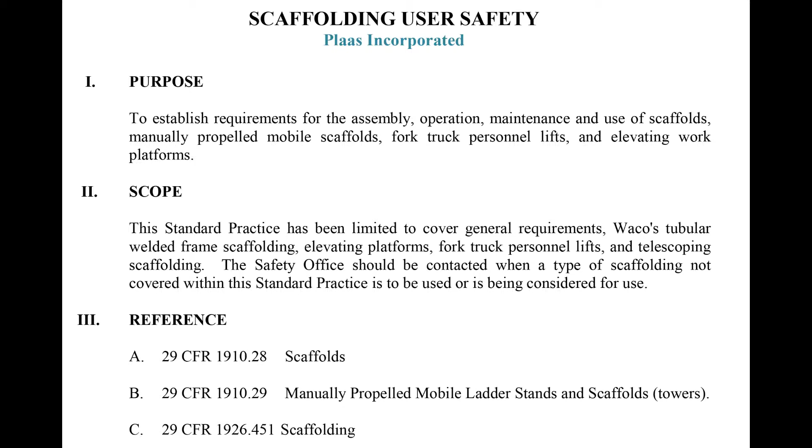Number 3, reference: 29 CFR 1910.28 scaffolds, 29 CFR 1910.29 manually propelled mobile ladder stands and scaffolds, towers, 29 CFR 1926.451 scaffolding. Procedure. General requirements.

When erecting scaffolding, the Scaffold Safety Rules, Appendix A, will be posted in a conspicuous location at the worksite. Supervisors shall ensure that all personnel who erect, dismantle, or use scaffolding are aware of the safety rules and are properly trained. All scaffolding and elevating platforms, either leased or purchased, will have the manufacturer's safety instructions for erection and use available. Scaffolding and elevating platforms shall be erected and used following the manufacturer's instructions and this standard practice.

Scaffold components manufactured by different vendors will not be mixed. Mud sills and anchorage points for scaffolds and platforms will be sound, rigid, and capable of carrying the maximum intended load without settling or displacement. If the ground area will settle, a large mud sill capable of carrying the load without settling shall be used to support the scaffold or platform. Unstable objects such as barrels, boxes, loose bricks, or concrete blocks will not be used to support scaffolds, planks, or platforms.

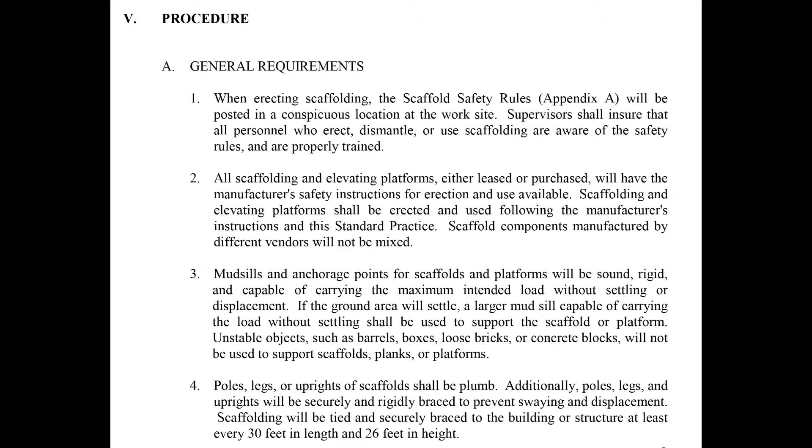Poles, legs, or uprights of scaffolds shall be plumb. Additionally, poles, legs, and uprights shall be securely and rigidly braced to prevent swaying or displacement. Scaffolding will be tied and securely braced to the building or structure at least every 30 feet in length and 26 feet in height. Exception: freestanding scaffolds may be 4 times the narrowest base dimension. If additional height is required, the base dimension will be increased, or the scaffolding will be tied and braced to the building or structure or have guy wires.

Scaffolding whose working platform is 10 feet or greater in height shall have a standard guardrail, midrail, and toe board installed. Scaffolding having a width of less than 45 inches must have standard guardrails installed on all open sides and ends when the working platform height is 4 feet or greater. Guardrails and midrails will be at least 1.5 inch nominal diameter with posts spaced not more than 8 feet on center. The guardrail shall be capable of withstanding a load of 200 pounds when applied from any direction and at any point on the top rail.

The top rail will be placed at a height of 42 inches nominal from the upper surface of the rail to the working platform. The midrail will be placed approximately halfway between the top rail and the working platform. Toe boards will be at least 4 inches in height and mounted within 1/4 inch of the working platform. Where persons are required to work or pass under the scaffold, scaffolds will be provided with screens between the toe board and guardrail. The screen will extend along both ends and sides of the scaffold and consist of number 18 US gauge 1/2 inch wire mesh or equivalent.

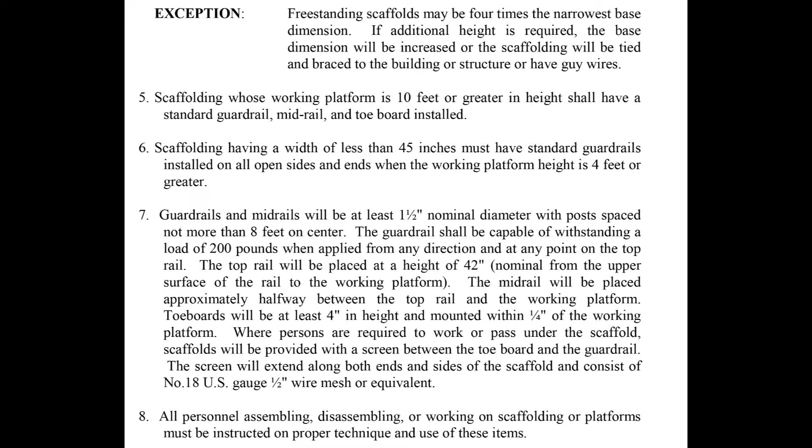All personnel assembling, disassembling, or working on scaffolding or platforms must be instructed on proper technique and use of these items. Manually propelled scaffolds and elevating platforms will not be moved when occupied. Head protection is required for workers on or around scaffolding. Working on scaffolds or platforms during storms, high winds, or when covered with snow or ice is prohibited. The live load of the scaffolds or platforms will not be exceeded.

A visual inspection must be conducted immediately when a scaffold or platform has been damaged or weakened from any cause. The structure will not be occupied until the inspection has been completed and all identified discrepancies corrected. Ladders or makeshift devices shall not be used to increase the height of the scaffold or platform.

Tools and parts shall not be carried in hands or pockets when ascending or descending access ladders. Tool belts, tool buckets, and ropes or other acceptable means will be used to raise and lower such items. Material being hoisted onto a scaffold must have a tag line.

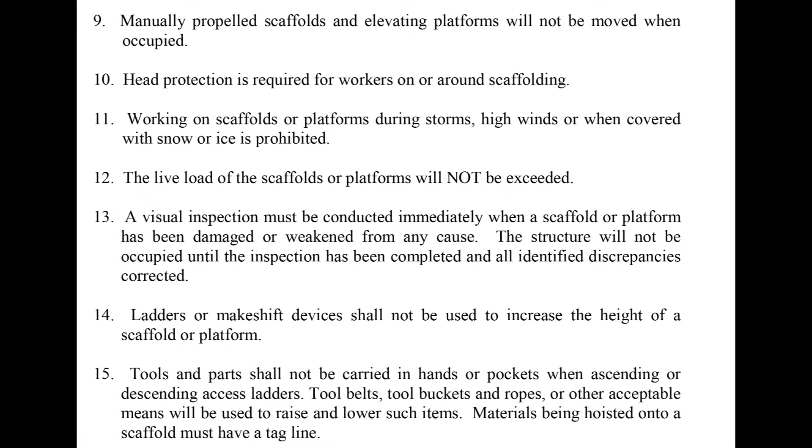Special precautions shall be taken to protect scaffold members, including wire or fiber ropes, when a heat-producing process or corrosive substances are being used. All wood planking shall be scaffold grade. The maximum span for wood planking is

Retraining is required in at least the following situations: where changes at the worksite present a hazard about which an employee has not been previously trained, or where changes in the type of scaffold, fall protection, falling object protection, or other equipment present a hazard about which an employee has not been previously trained, or where inadequacies in an affected employee's work involving scaffolds indicate that the employee has not retained the requisite proficiency.

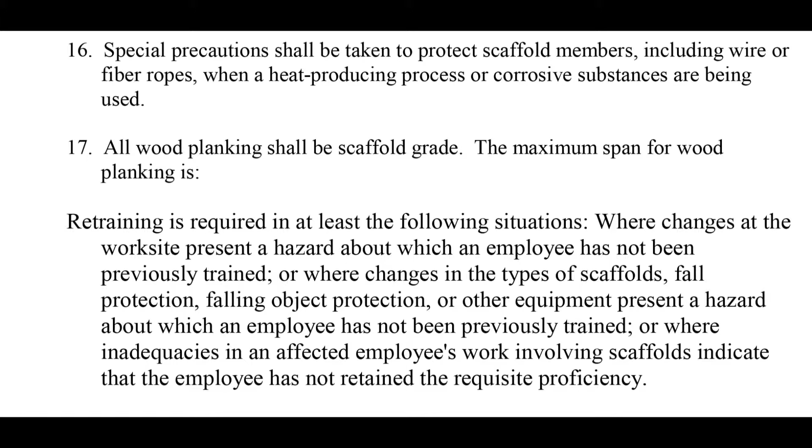Wood planking will extend over end supports at least 6 inches and a maximum of 12 inches. Additionally, planking will be cleated to prevent movement. Slippery conditions on scaffolds and platforms will be eliminated as soon as they occur. In-house manufactured scaffolding will be engineered prior to construction.

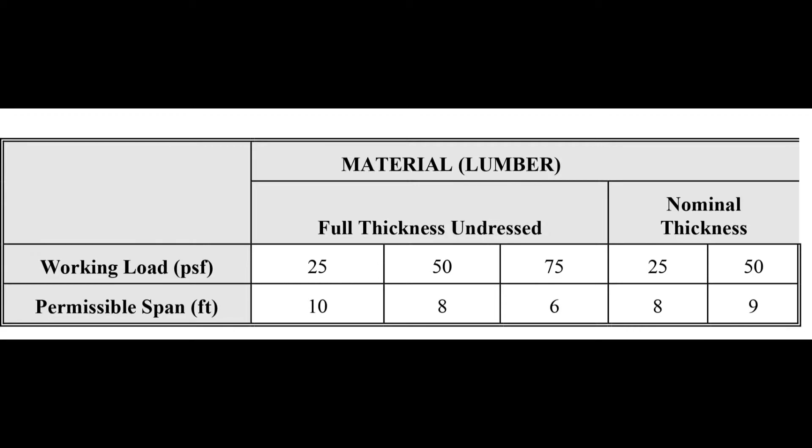Scaffolds and their components shall be capable of supporting without failure at least 4 times the maximum intended load. Wire, synthetic, or natural fiber rope used with scaffolds shall be capable of supporting without failure at least 6 times the rated load. Cross braces, runners, or bearers shall not be used for climbing. Access to scaffolds will be by stairs or ladders only.

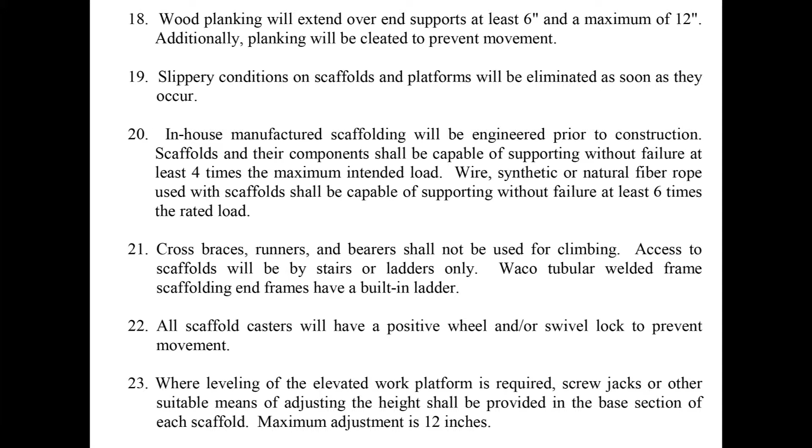Waco tubular welded frame scaffolding end frames have a built-in ladder. All scaffold casters will have a positive wheel and/or swivel lock to prevent movement. Where leveling of the elevated work platform is required, screw jacks or other suitable means of adjusting the height shall be provided in the base section of each scaffold. Maximum adjustment is 12 inches.

All sections of scaffolding will be locked together vertically by pins or other equivalent means. Frames and accessories for scaffolds shall be maintained in good repair. Every defect, unsafe condition, or non-compliance with this standard practice will be corrected immediately. Any broken, bent, rusted, altered, or otherwise structurally damaged frame or accessory will not be used.

Tubular welded frame scaffolds. The assembly, erection, operation, use, and maintenance of tubular welded frame scaffolds shall meet manufacturer's requirements and recommendations. Mud sills shall be placed under each leg. A continuous mud sill, which is under both legs of a side, that is 2 inches by 10 inches by 78 inches minimum, is recommended. The minimum mud sills that will be used are 2 inches by 10 inches by 18 inches under each leg. Each leg base will be secured to the mud sill.

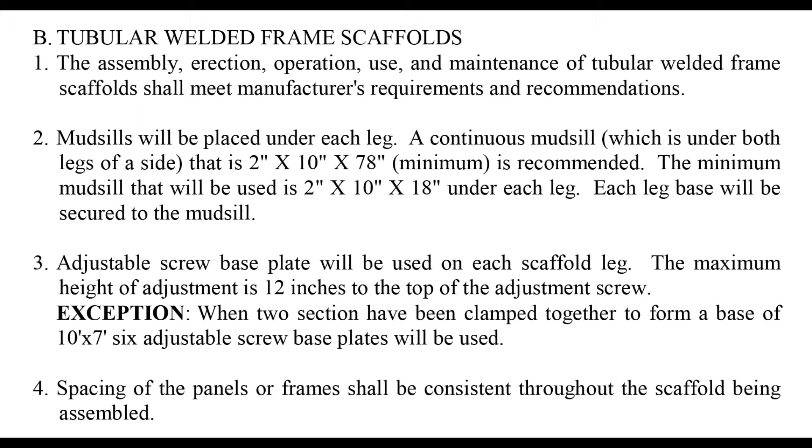Adjustable screw base plate will be used on each scaffold leg. The maximum height of adjustment is 12 inches to the top of the adjustment screw. Exception: when 2 sections have been clamped together to form a base of 10-foot by 7-foot, 6 adjustable screw base plates will be used. Spacing of the panel or frame shall be consistent throughout the scaffold being assembled.

Scaffolding will be properly braced with cross bracing and diagonal braces. Cross braces shall be such length as to automatically square and align vertical members so the erected scaffold is always plumb, square, and rigid. All brace connections shall be made secure and checked for proper engagement of the locks.

Diagonal bracing will be placed on the bottom of the first tier and at least every 20 feet thereafter. Diagonal bracing will be used in pairs. The frames will be placed one on top of the other with coupling or stacking pins to provide proper vertical alignment of the legs. The maximum live load for Waco 5-foot welded frame scaffolding is on the chart.

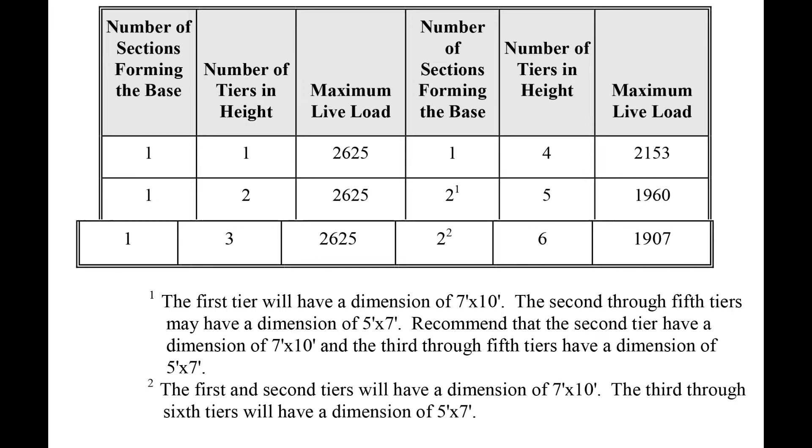The first tier will have a dimension of 7 foot by 10 foot. The second through 5th tiers may have a dimension of 5 foot by 7 foot. Recommended that the second tier have a dimension of 7 foot by 10 foot, and the 3rd through 5th tiers have a dimension of 5 foot by 7 foot. The 1st and 2nd tiers will have a dimension of 7 foot by 10 foot. The 3rd through 6th tiers will have a dimension of 5 foot by 7 foot.

Elevating platforms. Maintenance personnel will conduct preventative maintenance inspections. Operators will complete an operational inspection prior to each use. The live load must not exceed manufacturer's recommended capacities. Outriggers shall always be fully extended and in firm contact with the supporting surface. The platform will be operated following the manufacturer's instructions.

Fork truck personnel lifts. Fork truck lifts shall have a guardrail, mid-rail, and toe board. Personnel lifts shall be secured to the fork truck to prevent them from sliding off. Personnel lifts shall be equipped with a back guard. Guards must be at least 20 gauge 1/4 inch expanded metal and must extend at least 66 inches above the platform. During use, the back guard will be towards the fork truck.

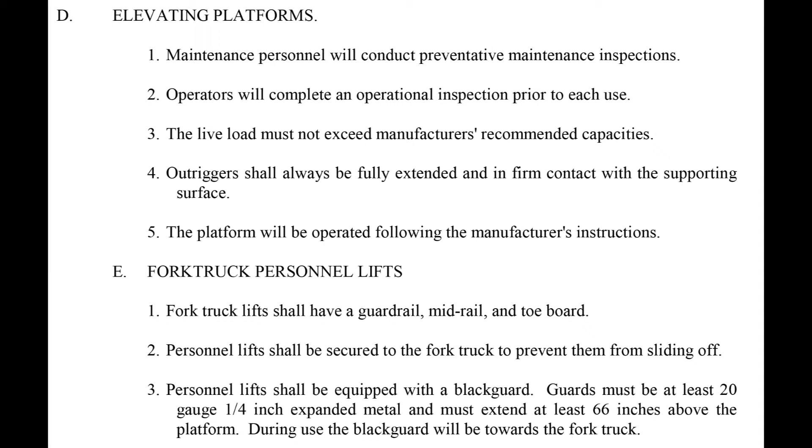Telescoping scaffold. The scaffold will be thoroughly inspected prior to each use. Outriggers will be fully extended prior to use. When the outriggers on the inside of the scaffold cannot be deployed, the scaffold shall be secured and braced to the structure if the top deck is raised. Once the desired height is obtained, a safety pin will be placed in each leg of the scaffold. Height adjustment is in 6-inch increments. Guardrails will be used at all times with this scaffolding.

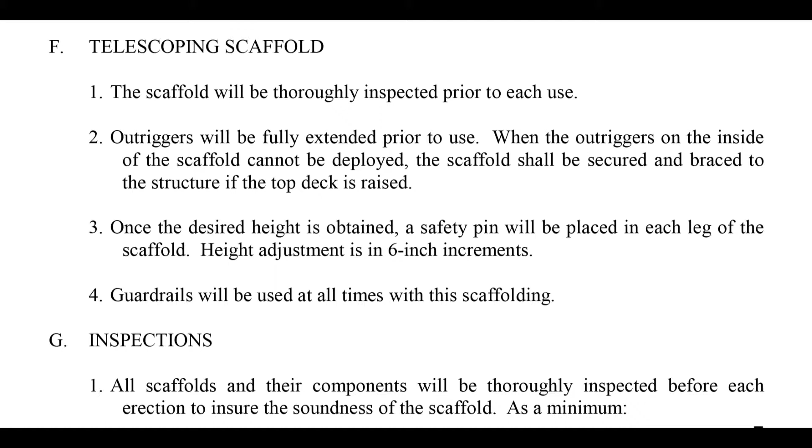Inspections. All scaffolds and their components will be thoroughly inspected before each erection to ensure soundness of the scaffold. As a minimum, A, a visual inspection will be made of the tubular components. All foreign objects on the inside of the tubular part will be removed. If the object cannot be removed, the part will not be used. B, the exterior and interior of all legs, runners, braces, and bearers will be inspected for corrosion. All corrosion found will be corrected.

EERC, Design Engineering, will verify that the part which contained the corrosion meets the design criteria after the corrosion has been removed. Components with corrosion will not be used since their strength is unknown. Wood components will be inspected for proper grade and indications of damage or deterioration. Complete the scaffolding inspection report and forward to the EERC Safety Office for review and filing.

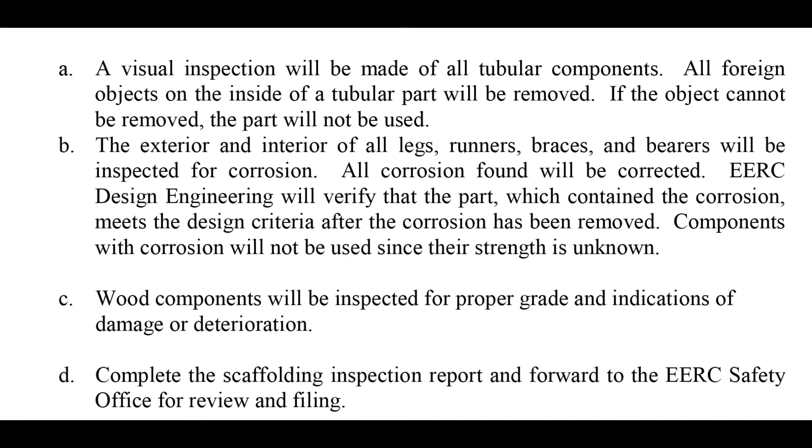Before scaffolding is erected, the surface of the proposed location will be inspected for stability, level, potential obstructions, and electrical hazards. Erected scaffolds will be visually inspected before each day's use to ensure a safe condition is maintained. A complete inspection of all scaffolds and elevating platforms will be completed at least semi-annually. Wire, synthetic, or natural fiber rope used with the scaffolds will also be inspected.

The operator, prior to each use following the manufacturer's instruction book, will inspect elevating platforms. Maintenance personnel will conduct a preventative maintenance inspection of all elevating platforms at least quarterly. This inspection will follow the manufacturer's instruction book.

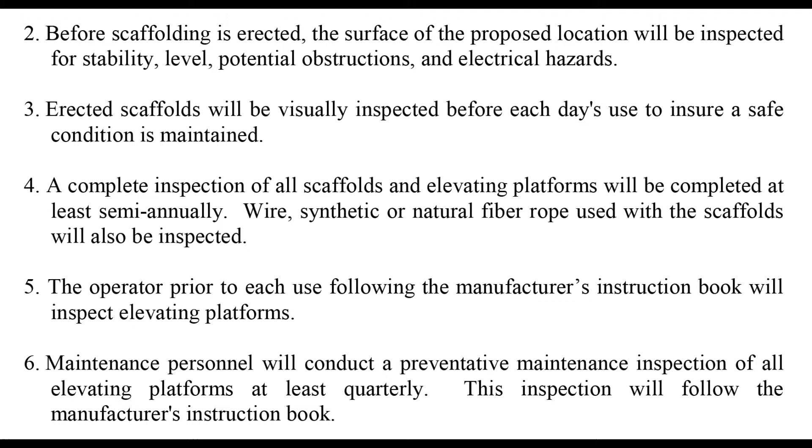Responsibilities. The program administrator will ensure that the requirements of this standard practice remain current with the applicable regulatory directives. Review scaffold inspection records at least annually with supervisors. Ensure that requirements of this standard practice are being followed by conducting inspections, reviews, spot checks, and other warranted follow-up action. Advise and provide assistance to supervisors as requested.

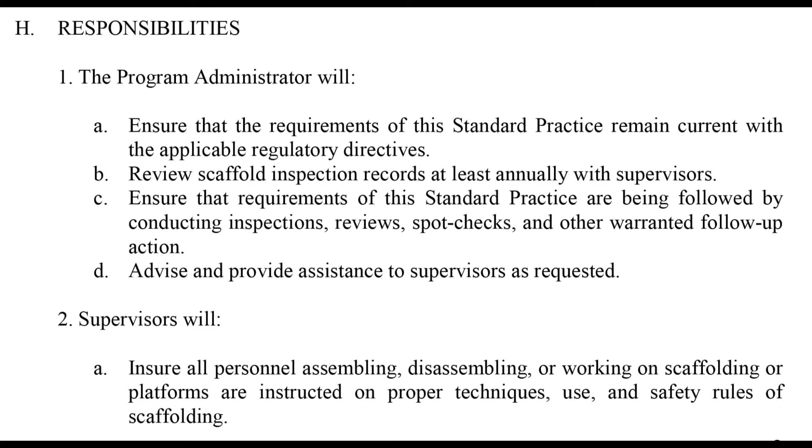Supervisors will ensure that all personnel assembling, disassembling, or working on scaffolding or platforms are instructed on proper techniques, use, and safety rules of scaffolding. Ensure that employees are following the requirements of this standard. Ensure that the completed scaffold assembly is inspected, that the manufacturer's instructions and that this standard practice were followed. Ensure that defective scaffolding is removed from service until defects are corrected.

Ensure that only qualified personnel repair or perform maintenance on scaffolding. Ensure scaffolding inspections are completed at least biannually and before each erection. Designate appropriate storage locations within their area of responsibility. Employees will properly use scaffolds following the requirements contained in the standard practice and according to manufacturer's instructions. Immediately inform their supervisors of scaffold defects. Tags on broken or unsafe equipment. Tags must be used when defective equipment or unsafe conditions are found.